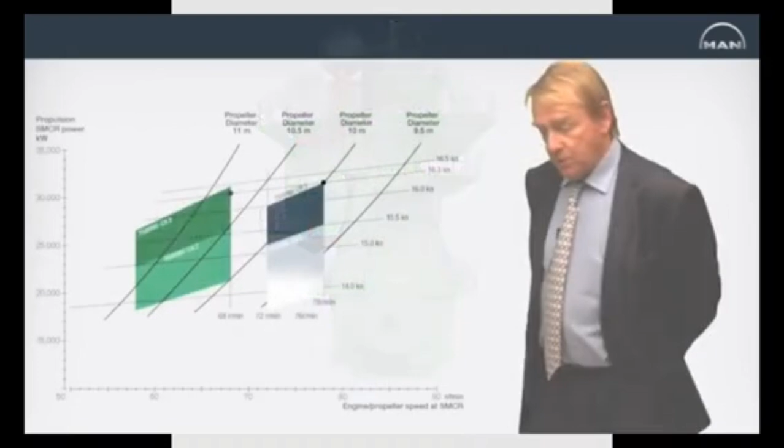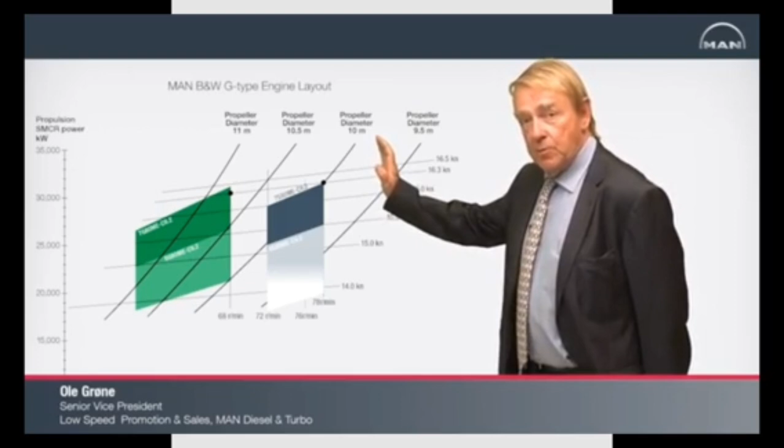With regard to the G engines, the essence is that we utilize a lower RPM. We have always been able to utilize lower RPMs by using our layout diagram, which follows very flexible layout principles. What we do now with the G engines is push the whole diagram a little to the left, thereby getting lower RPMs and better propeller efficiency.

Going from the S engine to a G engine means extending the stroke-to-bore ratio, giving an engine with a longer stroke and a lower RPM. This also gives better efficiency of the propeller.

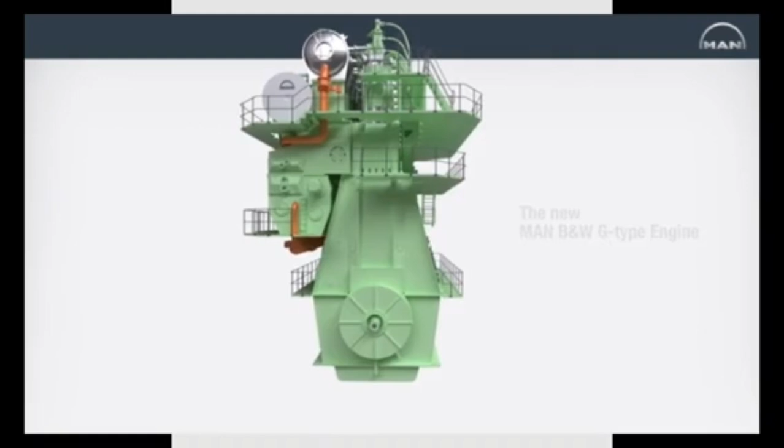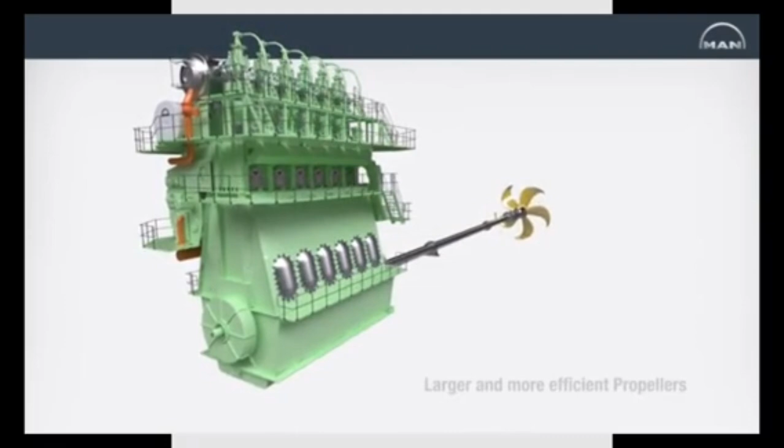The G-type engine has a design that follows the principles of MAN Diesel and Turbo's large-bore S-type Mark 9 engine, but its ultra-long stroke enables a reduction of engine speed, paving the way for ship designs of unprecedented high efficiency. Using the latest aft-hull designs that allow the use of larger and more efficient propellers, the new MAN B&W G-type engines will enable tankers and bulk carriers to operate at even lower speeds and fully exploit the savings potential this new technology offers.

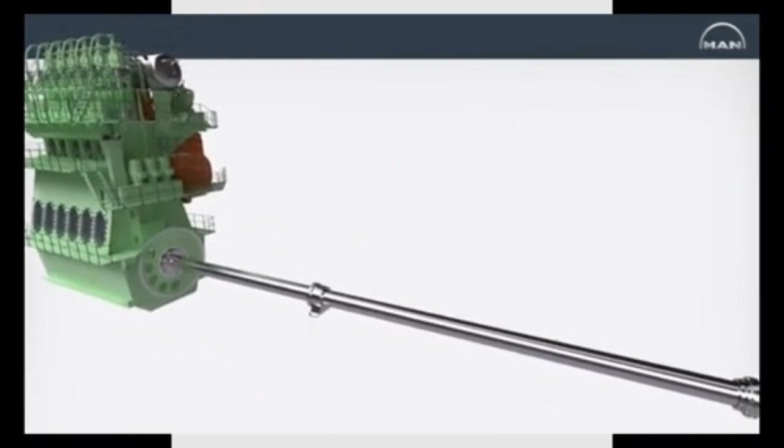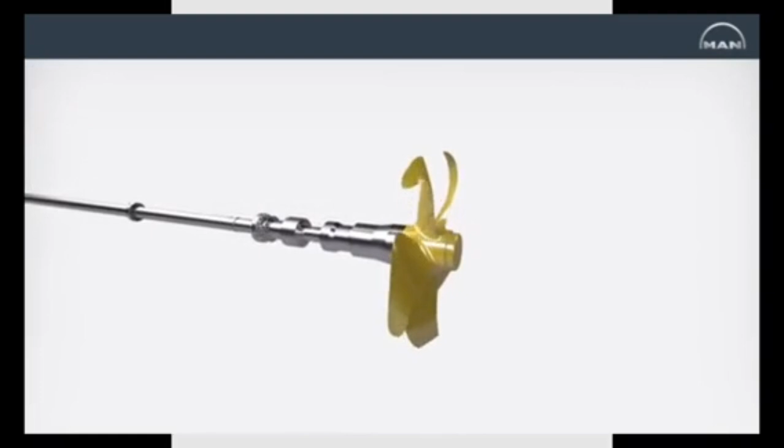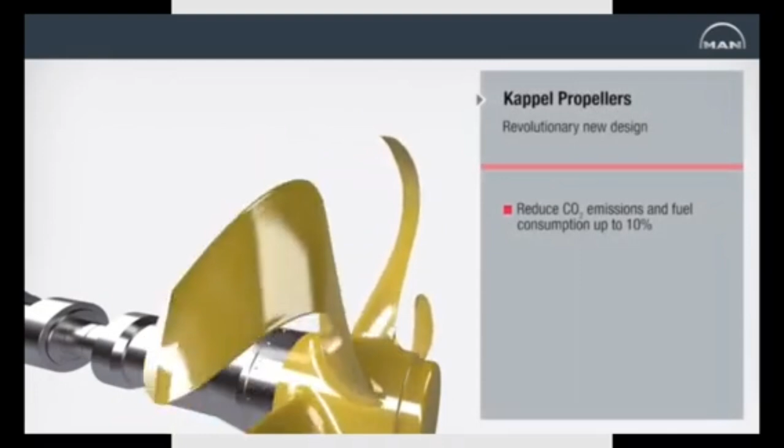The development of the Kappel propeller portfolio is the result of a concentrated body of work lasting over two decades. The Kappel propeller minimizes the flow of water over each propeller tip, increasing the total efficiency of the propeller compared to conventional units. In combination with the G-type engine, Kappel propellers can reduce CO2 emissions and fuel consumption by up to 10%.

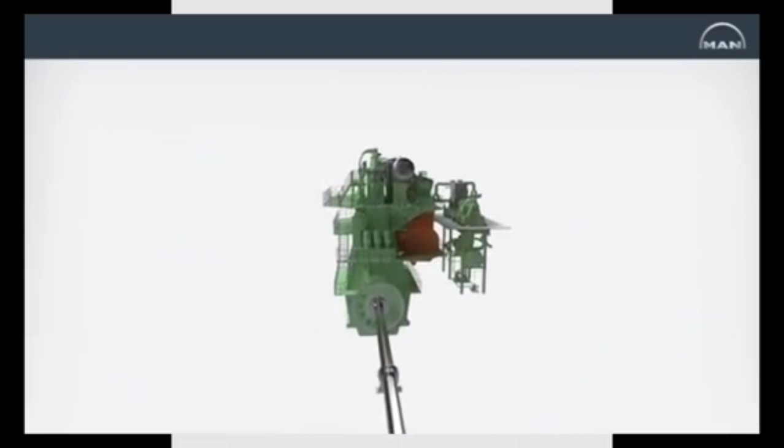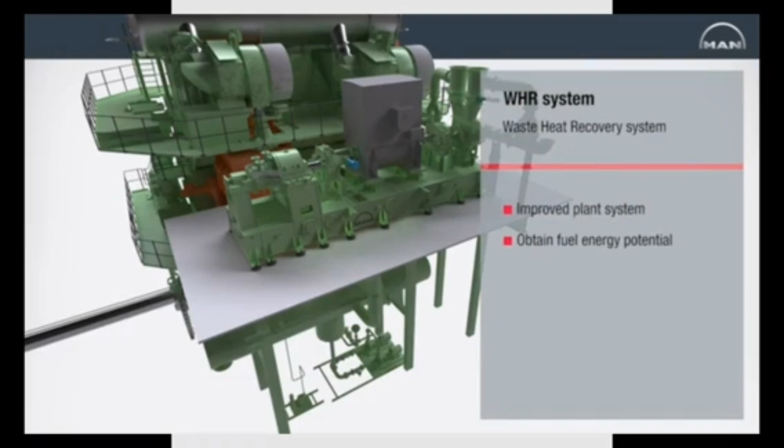The most efficient way to increase the total efficiency of a ship with a 2-stroke engine is to utilize the engine's waste heat. This waste heat is primarily collected from the engine's exhaust gas. The MAN Diesel and Turbo developed Waste Heat Recovery, or WHR, system utilizes the exhaust gas temperature to heat up steam, which in turn drives an ultra-efficient steam turbine.

When waste heat recovery is combined with NOx reduction methods, such as an EGR system, total efficiency can be significantly raised.

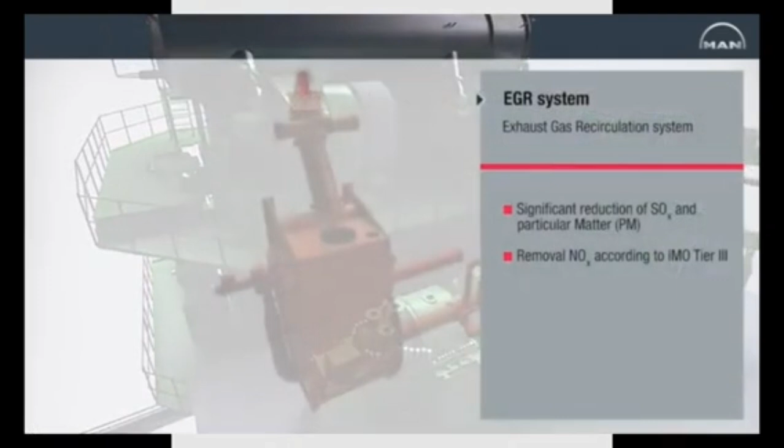The MAN Diesel and Turbo developed Exhaust Gas Recirculation, or EGR, system is based on the principle of reintroducing part of the exhaust gas back into the cylinder, thereby reducing NOx formation by lowering the peak temperature in the cylinder. In this way, up to 40% of the exhaust gas can be circulated through the EGR string of the system.

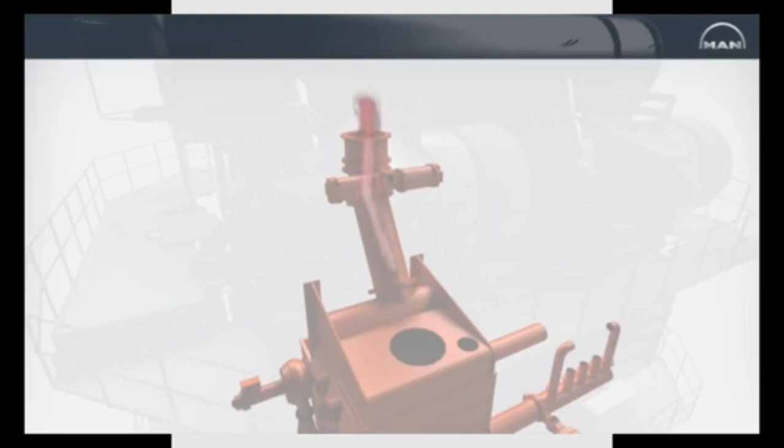The exhaust gas in the EGR string is first cooled down from 200-500 degrees Celsius to around 80 degrees Celsius by means of a pre-scrubber that absorbs and neutralizes sulfur dioxides and traps particles.

From the scrubber unit, the exhaust gas is led through a water mist catcher that traps water droplets and prevents water carryover before the exhaust gas can be reintroduced into the scavenge air receiver.

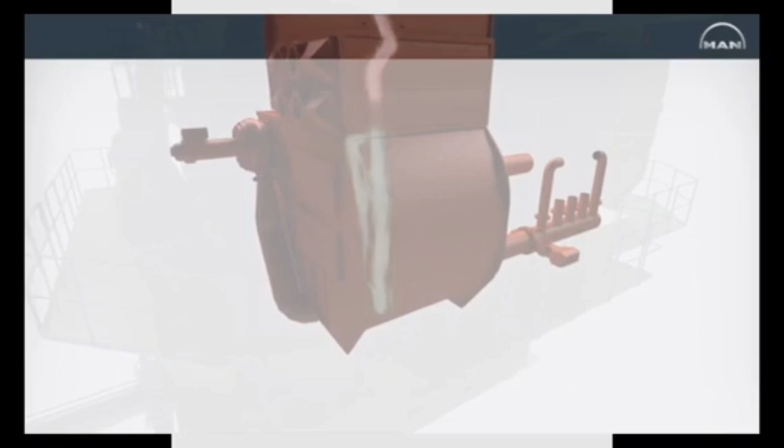Tests of EGR units have displayed considerable reductions in NOx, with just a low penalty in terms of overall system efficiency. MAN Diesel and Turbo consistently invests in its research and development program to reduce the environmental footprint of its existing engines, introduce new, greener engines, and develop ever cleaner technologies that seamlessly integrate with its product portfolio.

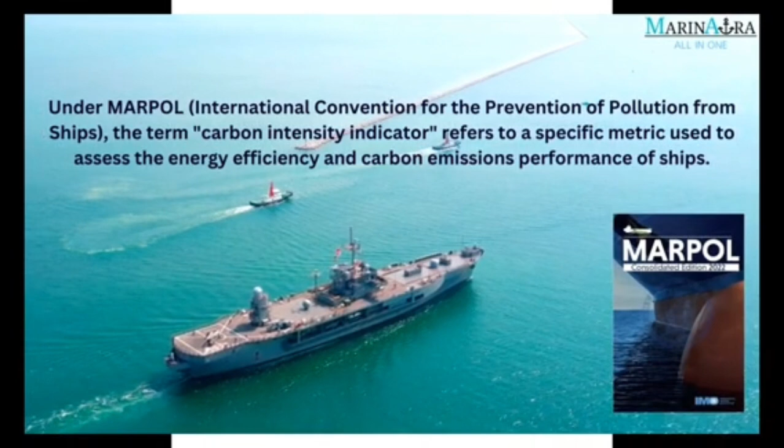What is Carbon Intensity Indicator, CII? Under MARPOL, the International Convention for the Prevention of Pollution from Ships, the term carbon intensity indicator refers to a specific metric used to assess the energy efficiency and carbon emissions performance of ships.

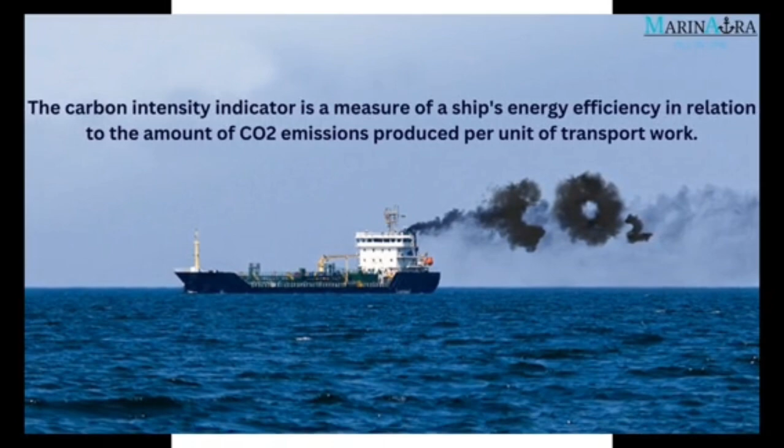The International Maritime Organization, IMO, which governs MARPOL, has introduced regulations aimed at reducing greenhouse gas (GHG) emissions from international shipping. The carbon intensity indicator is a measure of a ship's energy efficiency in relation to the amount of CO2 emissions produced per unit of transport work.

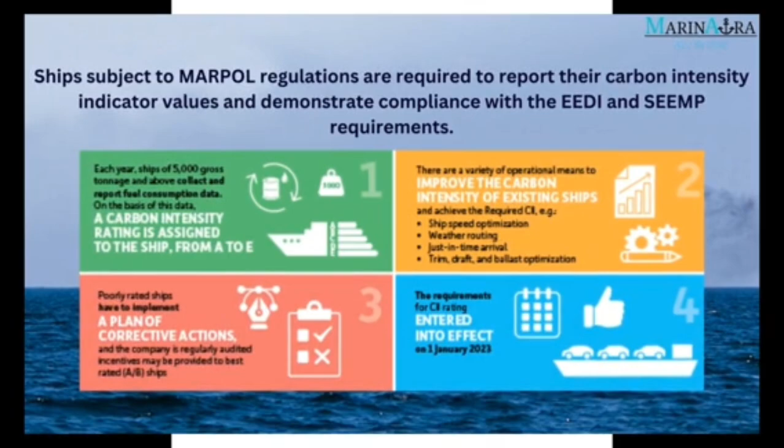Ships subject to MARPOL regulations are required to report their carbon intensity indicator values and demonstrate compliance with the EEDI and SEEMP requirements. The carbon intensity indicators enable monitoring, benchmarking, and improvement of ships' energy efficiency and carbon emissions performance over time.

A key solution is switching to alternative fuels. But what are they? How do they work? What challenges do they bring?

We will discuss hydrogen, ammonia, biofuels, and methanol, exploring their benefits, challenges, and real-world applications.

Let's begin with hydrogen and ammonia as alternative fuels. Hydrogen is a promising zero-emission fuel. When used in fuel cells, it produces only water vapor, making it environmentally friendly. However, high production cost and storage difficulties are major challenges.

Ammonia is a promising alternative fuel with a high energy density and low viscosity, making it suitable for long-range shipping operations. Green ammonia, produced using renewable energy sources, is a carbon-free fuel. However, ammonia is highly toxic and requires specialized handling and storage facilities.

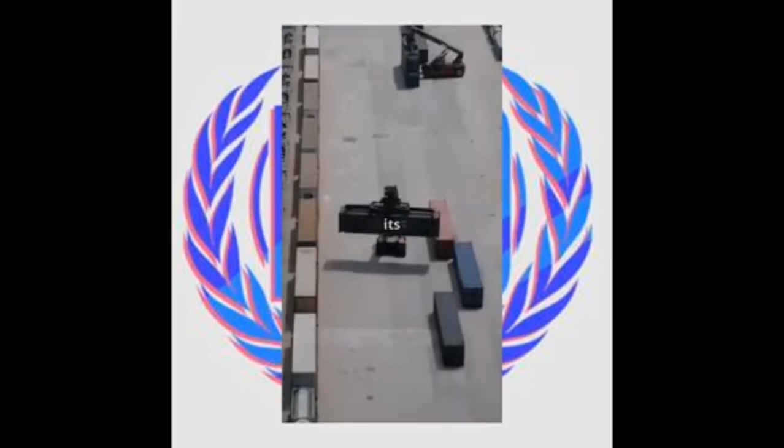Introducing methanol fuel, a revolutionary way to power our ships that's cleaner and greener. Created by combining air and green hydrogen, methanol captures carbon dioxide from the atmosphere, turning it into a clean-burning fuel source. Companies like Hapag-Lloyd are already embracing methanol, proving its practicality and cost-effectiveness.

This shift could reduce emissions by up to 70%, driving us toward a greener future. And guess what? Methanol is compatible with many existing engines, making the switch seamless and financially viable. What are your thoughts on this groundbreaking technology?

Biofuel, derived from plants, oil, and waste, are a viable alternative since they can be blended with traditional fuels, requiring little to no engine modifications.

Methanol, produced from biomass or captured CO2, is gaining popularity. It remains liquid at room temperature, making storage and transport easier than hydrogen or ammonia.

One key development is Maersk's investment in methanol-powered vessels. The company plans to deploy a fleet powered by methanol, setting a precedent for the industry.

Furthermore, biofuels and methanol offer a practical transition for shipping companies hesitant to adopt more complex alternatives. Their lower carbon footprint makes them an attractive choice for near-term sustainability.

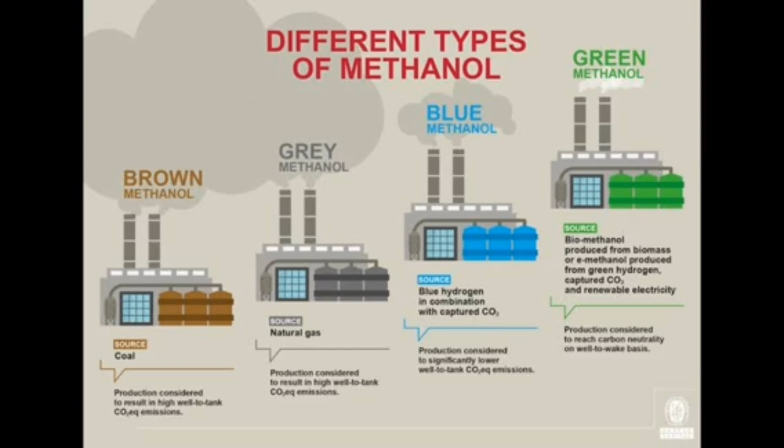Industry initiatives and future outlook. Shipping giants like Hapag-Lloyd, Maersk, and CMA CGM are adopting methanol and dual fuel vessels, paving the way for industry-wide change.

The IMO 2023 strategy promotes zero or near-zero GHG fuels, with increased investment in research and infrastructure to support this transition.

One challenge remains cost. Alternative fuels are still more expensive than traditional marine fuels, but technological advancements are expected to drive costs down.

Public-private partnerships and government incentives will play a crucial role in accelerating the transition. Countries like Japan and Norway are already investing heavily in green shipping technologies.

So what's next for the industry? Experts predict that a combination of these alternative fuels will be used to meet varying operational needs.